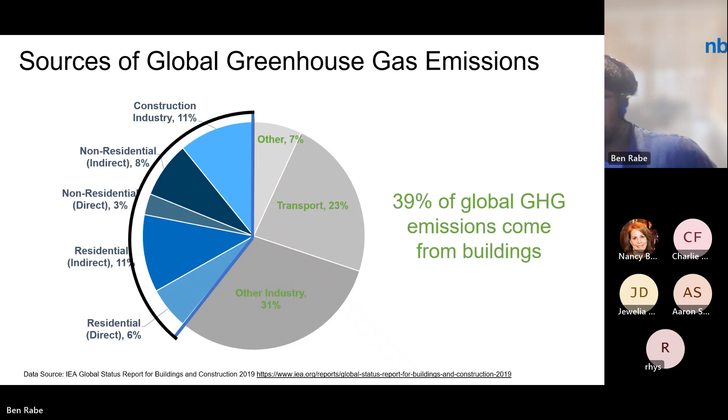And then finally, something we're just getting started working on and thinking about is life cycle impacts of the building industry - that's construction, development of materials, mining of materials, as well as end of life cycle and the carbon impacts there.

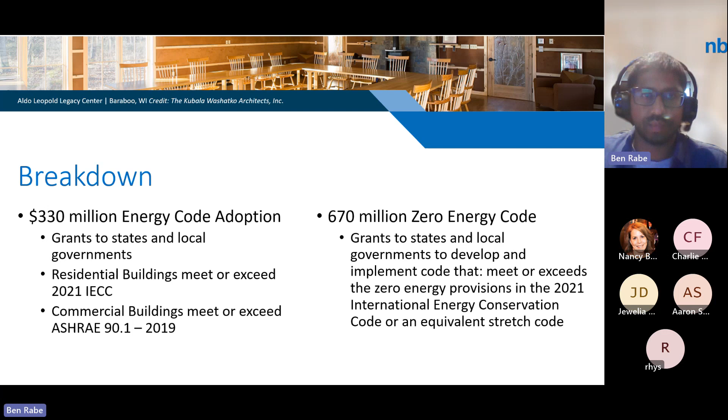And then additionally, the Zero Energy Home Appendix is another avenue. The breakdown here, which surprised a lot of folks including us, is that about a third of it goes to local adoption of the base energy code that meets or exceeds the 2021 IECC or ASHRAE 2019, and those grants flow through state and local governments. But two-thirds of it will go towards the Zero Energy Code, or the Zero Energy Appendix - which is Appendix RC within the IECC - so we'll get into that a bit more, but that will encourage jurisdictions to move in that direction.

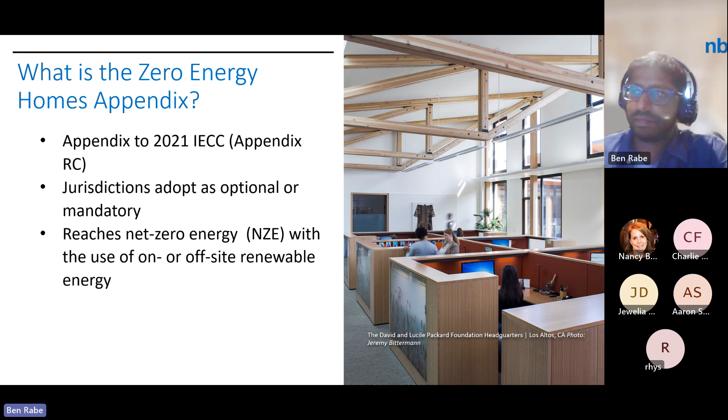The Zero Energy Appendix is an optional appendix within the 2021 IECC, as well as the 2024 IECC, which allows jurisdictions to adopt as mandatory or optional, reaching net zero energy use with on-site versus off-site renewable energy. Energy use is balanced with on-site power production, as well as community renewable energy facilities, like community solar gardens or renewable energy purchase contracts, both of which require 15-year contracts. There's an energy efficiency baseline based on climate zone in the 2021 IECC, though in the 2024 IECC they're likely to be the same, calculated per modeling per RESNET 301.

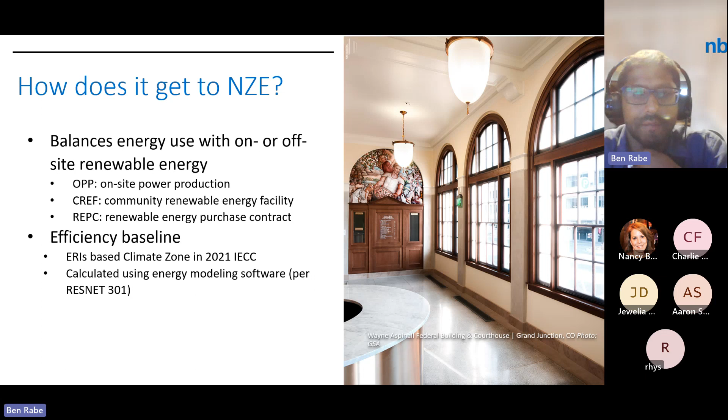Wow, I flew through my slides. Yeah, I flew through my slides.

So any questions for me before I pass it over to Reese?

So Ben, how do you think the mechanism is going to work with the Inflation Reduction Act monies for the states that are then going to push the 2021 IECC? And maybe the follow-on question is, what do you see the timeline being by state? I think we're already seeing some states start to move, Louisiana, I think just went to 2021 IECC. Can you talk us through what you see that process looking like and how long it's going to take?

It's taking longer than it was expected to and outlined, which is not particularly surprising. We initially expected it to get underway early this year and then money to start flowing by the end of the year. I do not see that happening until early next year at the latest.

What that process will look like will likely be very different in every state, because that is going through state energy offices, and they all operate very differently. State energy offices are in different state agencies in different states. Some states it's in organizations that look more like the EPA. Other states it's more like in Minnesota, where I am, it's located in the Department of Commerce. So it will likely have a lot to do with how that is organized. In Minnesota, oddly enough, the state energy office and the codes work are in different state agencies, so there'll likely be a coordination between those two agencies.

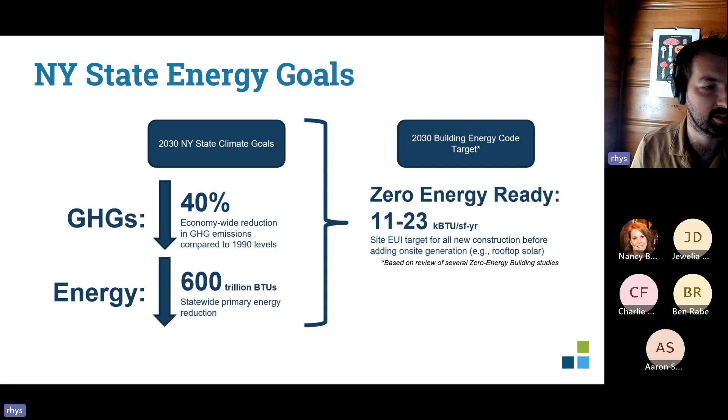So effectively, that's showing that new homes built to this code are coming in at a certain site energy use intensity, that when you add on rooftop solar or additional on-site generation, you can come out with this net zero building—which obviously has a lot of different definitions, and that's kind of contentious. But the idea is you really want high performance homes.

So to start that process off, in 2020, NYSERDA started publishing this advanced energy code called NYStretch, and it is effectively built on the state code, the Energy Conservation Construction Code in New York State. I believe I have my C's right there.

And the idea is that this one stretch code, available for all the different municipalities in the state to adopt, is a little bit easier and takes the work off of the municipalities to develop their own codes, providing more of a singular standard for the state for those municipalities looking to go above and beyond the state code.

And New York City, the biggest municipality in New York, actually passed a local law saying that they must consider adopting the most recent NYStretch code.

Now, the kind of next iteration of NYStretch, so they did NYStretch 2020. Now we are working on NYStretch 2023, and the goals for this iteration obviously are to continue that trend towards a zero energy ready code by 2030.

But now we're kind of focusing on envelope performance, and really trying to - we're not calling it a passive house code, it's not quite there - but we are trying to focus on the envelope and improving that above the previous codes, and also allowing builder flexibility with different code mechanisms while still encouraging building decarbonization.

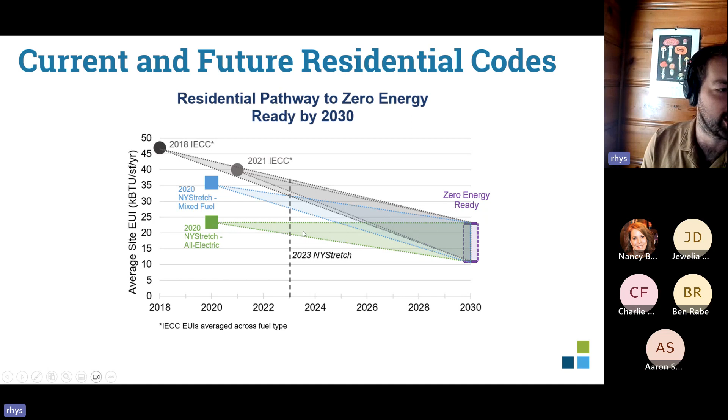You can see that for the all-electric buildings, if we're kind of targeting an EUI for this 2023 New York Stretch, just getting linearly closer to that zero energy ready mark, we're aiming for a site EUI in the low 20s when considering a typical home.

So to look at the actual measures that we're proposing, compared to the 2020 baseline - the 2020 state code and the 2020 New York City code, which is based on the 2020 New York Stretch code.

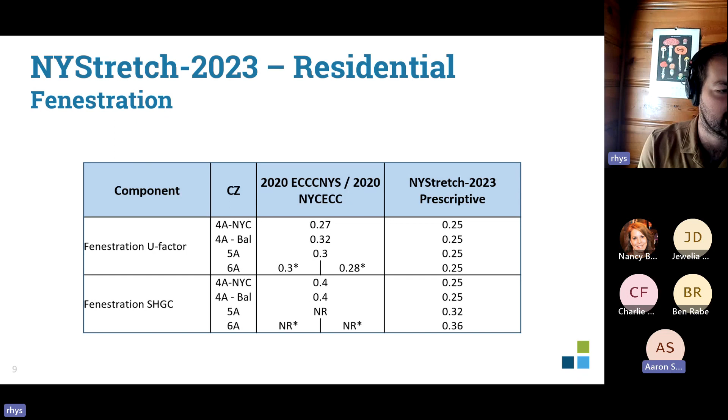So looking component by component, looking at fenestration, especially windows here, you can see that basically we're proposing 0.25 U factor across the board for all windows in all climate zones, and proposing a solar heat gain coefficient maximum level that didn't exist in the 5A and 6A climate zones previously.

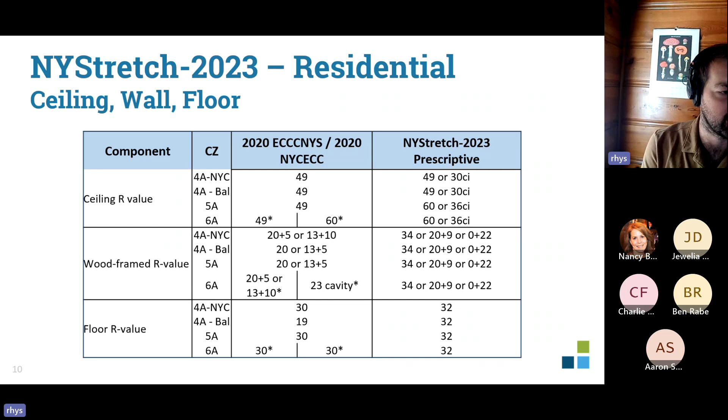I know I'm getting into the weeds a little bit here, but hopefully there are folks who are interested in the weeds on this call. So, increasing the levels of continuous insulation. There are also measures I'll get into later that we're taking to avoid thermal bridging in this code that haven't existed previously - I'll get into that in a bit. And then just upping the floor R value requirements.

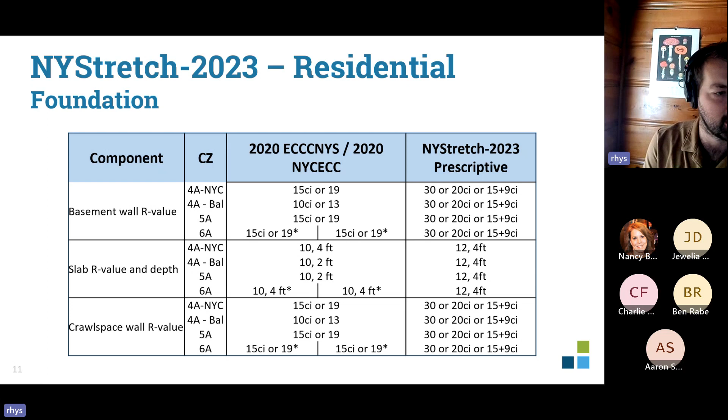For foundation levels, kind of a similar story, just increasing levels of continuous insulation, because that's the best way to avoid thermal bridging through the envelope, and just increasing some of the slab R value and the depth that the insulation is required to go below the slab.

The air leakage requirements are not changing too much on the mandatory side, still 3 air changes per hour. We are tweaking the language so that it's better in alignment with the commercial language, and the reason for that is, if you have a 3-story multifamily building, we don't really want the requirements to be drastically different than the 4-story commercial building.

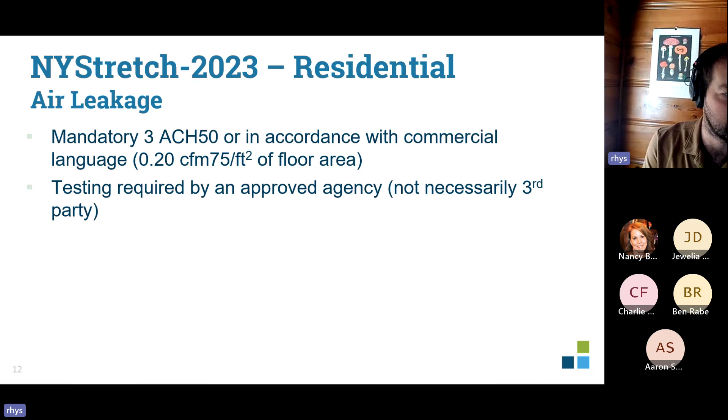So we're trying to adjust and align those two languages to be similar. We are requiring testing by an approved agency. That doesn't necessarily mean a third party, but it ensures that the folks doing the air leakage testing have the credentials to do so, and that's at the discretion of the code official.

As I said, the thermal bridging mitigation section we're adding requires above ground walls to either use continuous insulation, which has a couple different options, structural insulated panels, insulated concrete forms, or double wall framing. This effectively removes the option to just use cavity insulation in a standard 2x4, 2x6 wood frame wall. So we're really harping on the need to use continuous insulation or some other method of mitigating thermal bridging in the above ground walls.

There's other language around the envelope, not piercing it with any balconies or beams without a thermal break or insulation, and the same kind of installation requirements for windows and parapets.

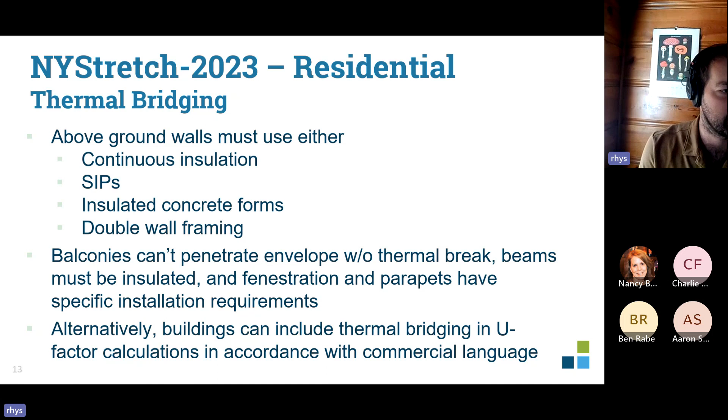There's an alternative calculation that buildings may go through to get out of these more prescriptive requirements. That's located in the commercial language, but it basically requires builders to calculate the effective U-factor when considering thermal bridging impacts. That obviously provides flexibility but adds complications if you go that route.

Nothing huge is changing on the duct systems, but they're just required to be in a conditioned space or buried in ceiling insulation and sized appropriately.

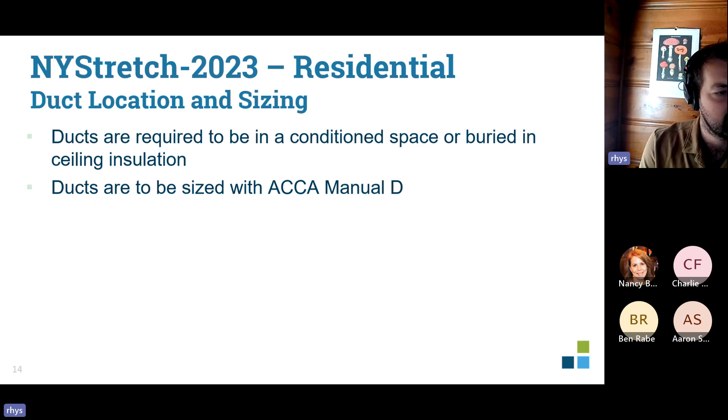One of the bigger changes we're making is on water heating efficiency. We're basically requiring builders to take one of five packages. If you don't want to use an above-minimum efficiency water heating system, you're left with package 1 or 2 — either solar water heating backup or supplemental solar water heating, or drain water heat recovery and recirculation pump. But really, the easiest option is to just go with a heat pump water heater, either a very efficient one or a standard efficient heat pump water heater with one extra measure associated with it.

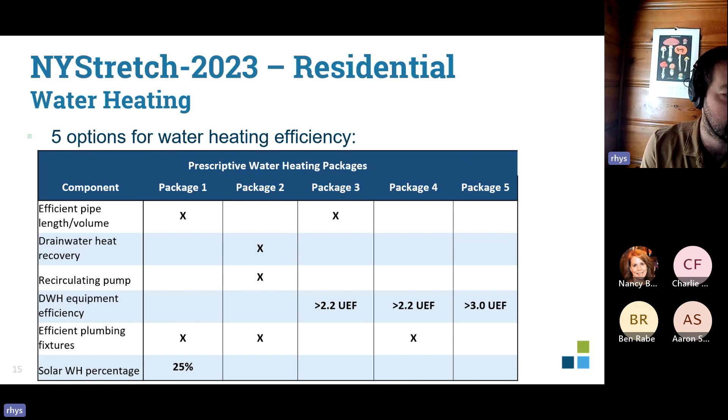That's just kind of chipping away at the water heating savings a code can achieve, which historically hasn't been a big focus of the energy code — it's been more on heating and cooling energy use.

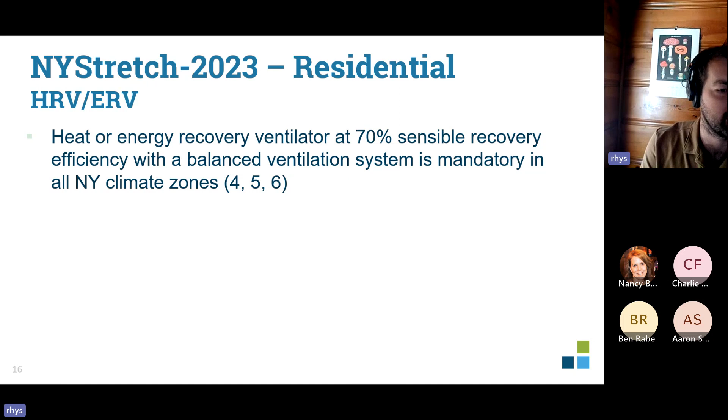Speaking of, we are requiring a heat or energy recovery ventilator with 70% sensible recovery efficiency in all climate zones, which is a change from the IECC, which only requires them in climate zones 6, 7, and 8, I believe.

Finally, the last thing we're requiring in the prescriptive section is energy credits, a new mechanism in the energy code that's being developed in the 2024 IECC. This is a more simplified version from what will probably be in the 2024 IECC, although I'm sure Ben can speak more to that. We're effectively requiring small single-family units and low-rise multifamily units to get 12 credits, and larger single-family homes to get 15 credits.

Basically you're just choosing from options that are above the prescriptive section, more stringent than that language. There are three envelope efficiency options, three air tightness options, an option to upgrade the HRV/ERV efficiency or HVAC distribution system, and then the big one is the HVAC credits, which basically require some level of heat pump.

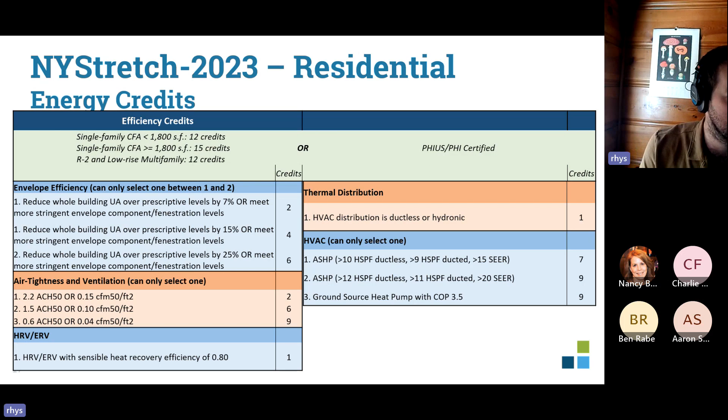So if you don't want to improve your HVAC mechanical efficiency and just keep it at the federal minimum efficiency, you can opt for the most stringent envelope and air tightness levels to hit that 15 credit mark — that's basically a passive house level building at that point. Or you can just take a heat pump and tack on a couple other easier to achieve credits, I would say. That's kind of what we're going for here.

One last thing — the energy rating index, which is an alternative compliance pathway. Based on the modeling associated with the prescriptive section, we're lowering the energy rating maximum targets for each climate zone, but also splitting it out between buildings with combustion equipment and without, just because of how RESNET 301 methodology ends up treating these two different kinds of buildings. So you can see those new targets there.

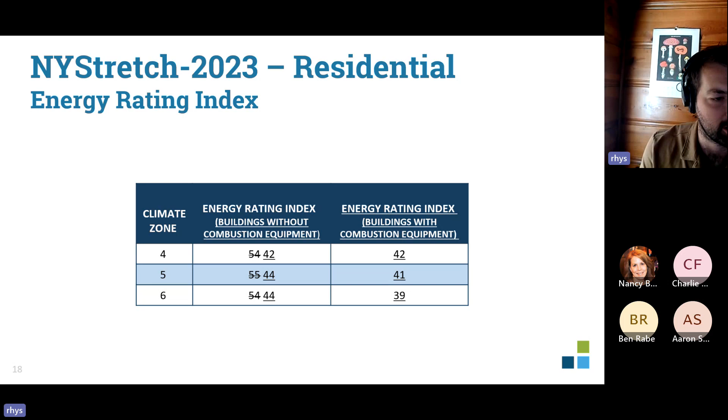A couple measures we've talked about putting in but have ultimately come out, and are going to go into the uniform building code, are related to electric readiness for buildings that aren't necessarily required to be all electric, rooftop solar, energy storage systems, electric vehicle readiness, and grid interactivity.

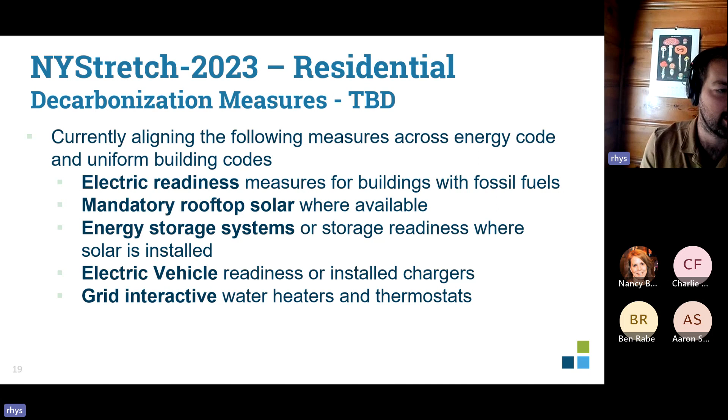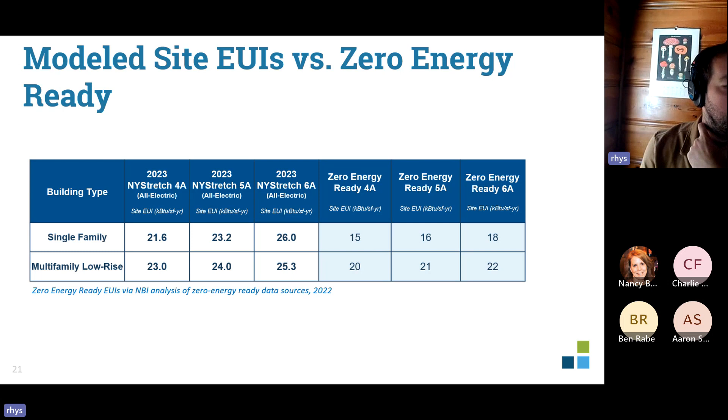We did a modeling exercise on the Department of Energy single family and low-rise multifamily prototypes using these prescriptive measures from the 2023 New York Stretch Code. I talked earlier about targeting an EUI in the low 20s when this is all said and done, and for the all-electric version of these New York homes built in New York Stretch, that's kind of where we came out. That's pretty promising to see that this code can really make that big leap forward towards the zero energy ready homes.

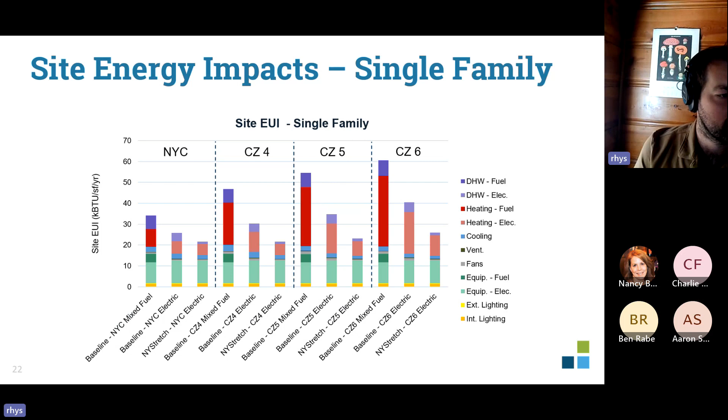Getting more into the nitty gritty on site energy impacts in each climate zone and region, including New York City, which is climate zone 4 but split out because it has a different baseline code. We're comparing the baseline codes for both a mixed fuel home and an electric home compared to an all-electric home built in New York Stretch in that third column. You can see there's pretty significant energy savings associated with this code, and obviously site energy depends a lot on which fuel you use, which is why you see those huge chunks of site energy used for heating and water heating in the mixed fuel homes. I'm going to jump to probably what's more important, a similar story on multifamily.

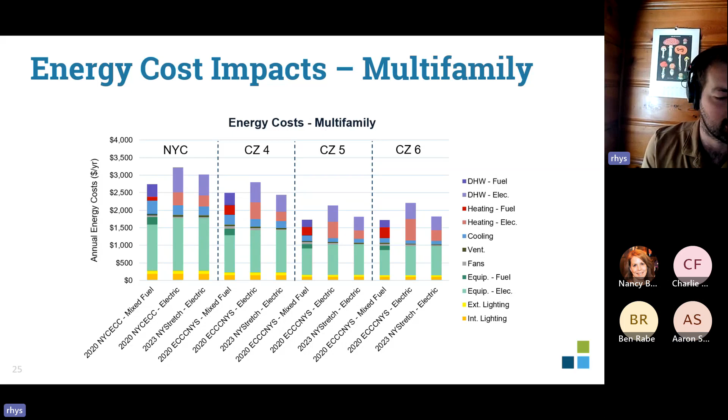That's something we're still working on - I want to frame all these results as still having tweaks being made. There's still discussion of whether the baseline should even consider gas now that things are changing in terms of the state legislature for all-electric buildings. It's kind of a similar story on multifamily.

Talking about the incremental first costs associated with the code, there are pretty significant costs that do end up, in most cases, paying for themselves. The biggest areas of cost we're looking at are wall and foundation insulation costs, and then that HRV/ERV cost is also pretty significant. We don't want to just say there's no impact of going to this code, but we do think it's worth these upfront costs as we're trying to get down to that zero energy home.

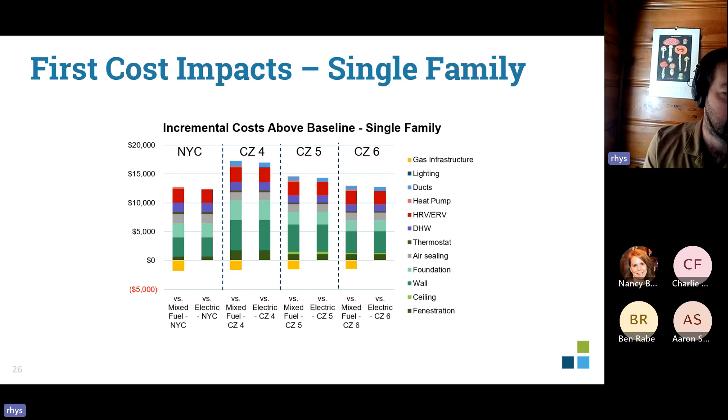It's really also about building homes that are comfortable and healthy, and I think ventilation is a big part of that, and passive survivability is a big part of that too.

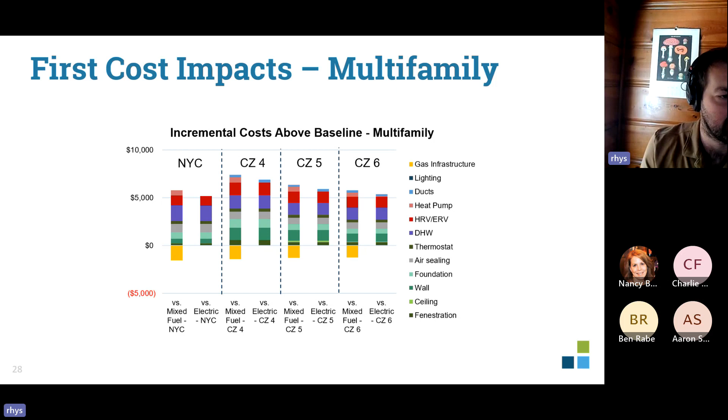Similar stories for the percent of total component. I know I just threw a ton of numbers at everyone, but I think the takeaway is that as all these codes are reaching closer and closer to that zero energy code component, like the Zero Energy Appendix Ben was talking about earlier, there are costs associated with this, but the technology for all these components is there and achievable. It's reasonable to expect some of these costs to come down. High performing buildings are something we can achieve, and have benefits beyond just energy costs - there's resilience benefits associated with it, and just in terms of having lower energy bills, there's equity benefits there.

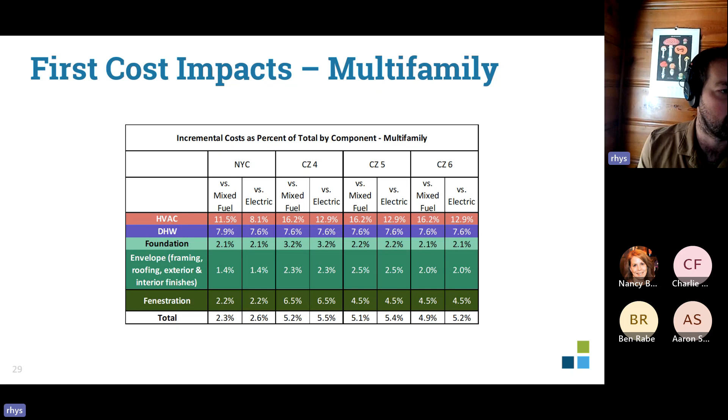That's kind of just the takeaways I wanted to share from the New York Stretch energy process, which again is still ongoing, and hopefully we'll have something out to the Code Council and to the Department of State in the coming months, but that's still going through internal and public processes. So I don't want to frame anything here as fully finalized.

Rhys, it's very interesting what's happening in New York City in particular, but New York State in general, and I think you've got great support there for some of these changes. How are the trades receiving it? I think it's mixed, which makes sense.

There are certainly builders who, over the past decade, New York has really focused on building these more high performance and green buildings, and I think there's a lot of builders who've gotten on board with that. That's just the way they've structured things. And perhaps this code is not really for them, I suppose.

But it's, I think, because of the cost increase—and it's not just costs, there are kind of technical building strategy components to this, building with continuous insulation as opposed to just putting in cavity insulation everywhere, and putting in the HRV, ERV systems. There's aspects of this that have a technical component that some builders haven't been accustomed to building with before.